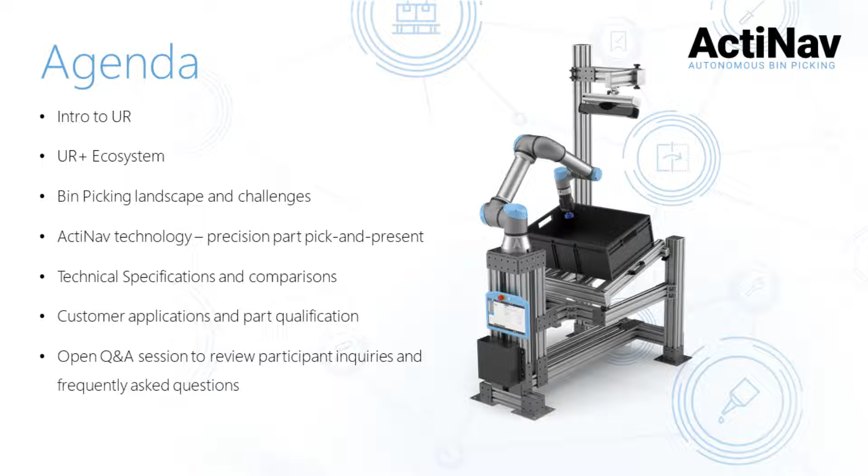A quick look at the agenda for today. I'm going to provide a very quick introduction to Universal Robots and our history in the collaborative robot space. We'll take a brief overview of our UR+ ecosystem and how ActiNav fits into it. I'll review the bin picking landscape of today and the associated historical challenges. I'll show you how ActiNav provides a precision part pick and present for a variety of applications with a primary focus on machine tending. Then we'll look at the technical specifications of ActiNav and compare it to some other bin picking technologies on the market. Then I'll look at application fit and some use cases, along with customer successes we've had. And finally, we'll have an open Q&A session to address some of your questions.

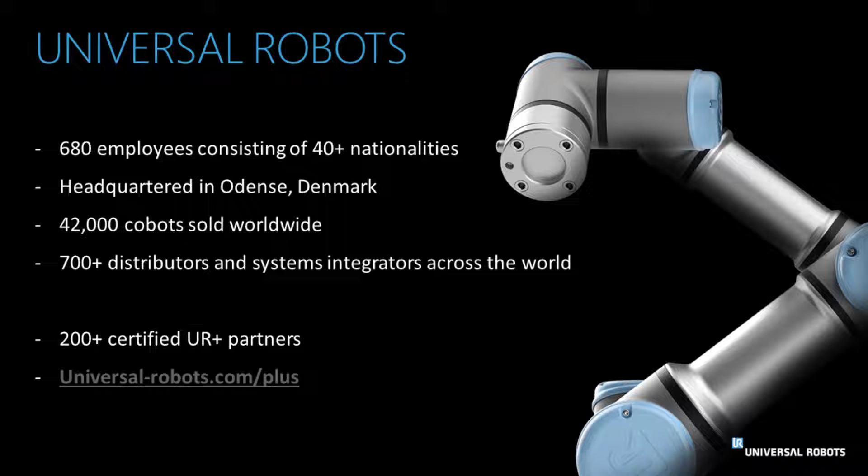So a brief introduction to Universal Robots. Universal Robots is a company of around 680 employees, of over 40 different nationalities. UR is headquartered in Odense, Denmark, where all of our robots are manufactured. We've deployed over 42,000 cobots worldwide and hold approximately 50% of the market share for collaborative robots. Our partner network is over 700 strong, including both distributors and systems integrators. Our UR+ store offers over 200 certified UR+ partners, UR+ being our peripheral ecosystem that I'll describe further on today.

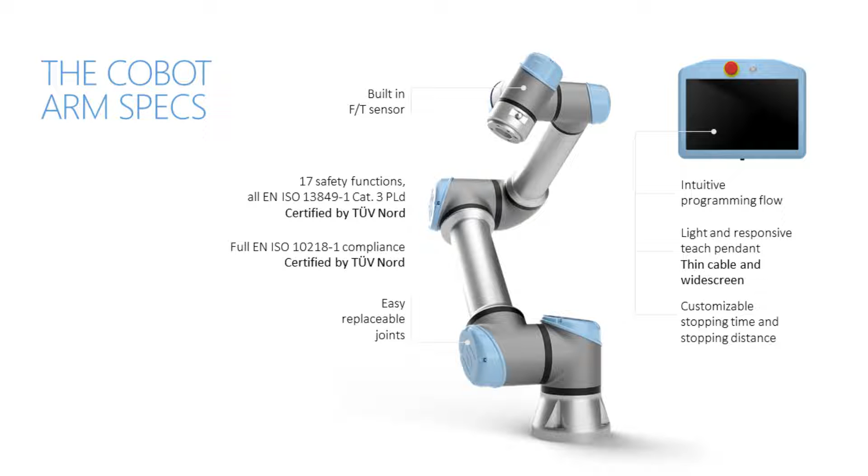The actual arm specifications themselves: all of our E-Series robots deploy with a built-in force torque sensor. We have 17 layers of safety functionality certified by TUV. We offer easily replaceable joints and a touchscreen pendant where all of your programming is done, including the ActiNav bin picking solution.

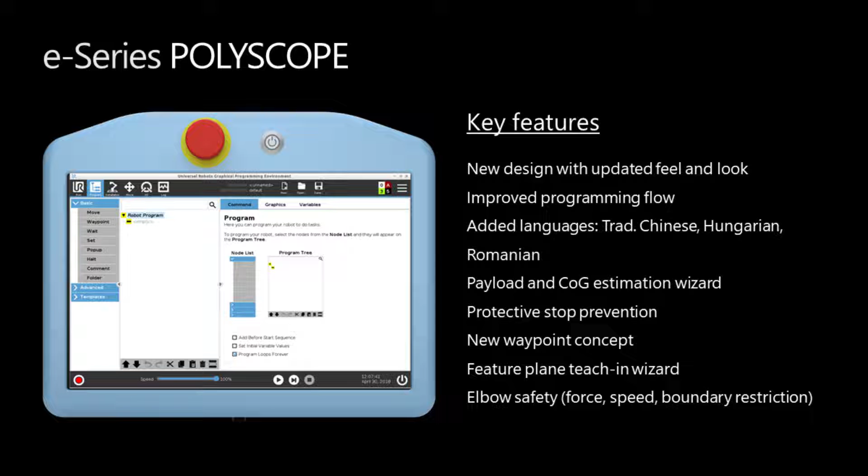The E-Series, again, our latest generation of cobot, has a number of improvements, including an improved programming flow, which we'll dive into a little bit further in the presentation, along with some wizards for payload estimation, center of gravity, and palletizing routines. There are also a number of safety features built into the new E-Series, including protective stop prevention and force, speed, boundary restrictions in the elbow.

A cobot can be thought of as a tool similar to a wrench, hammer, or a screwdriver. Using collaborative robots is significantly easier than the typical deployment of most types of traditional automation. Collaborative robots can quickly and easily be deployed to automate all or just a very small part of a process. This unique functionality allows for human workers to work with the cobot side by side and add value to each other's strengths.

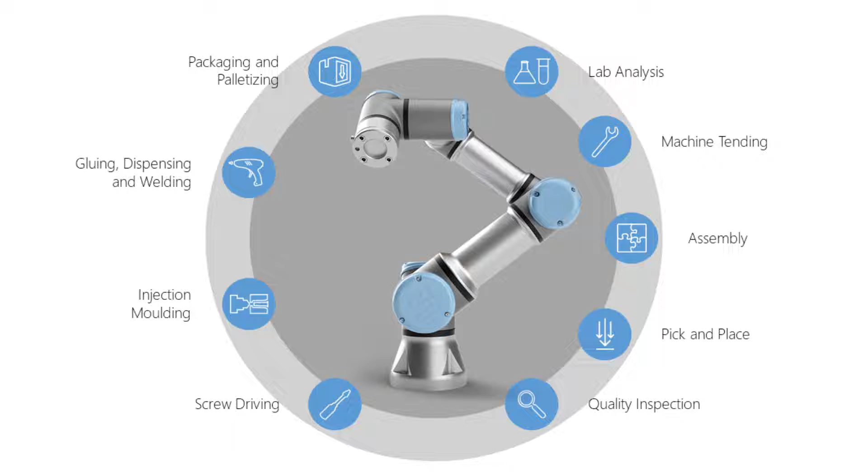Typical applications that cobots excel at are your standard pick and place, packaging and palletizing, machine tending, assembly and screw driving, quality inspection, but also path-dependent operations such as gluing and dispensing. However, we're not limited to just these types of applications. Sometimes apps can be very specific, such as cleaning parts with CO2, for example. These are applications that we see automated every day with tremendous success. They're common across all types of manufacturing and are proven to be great fits for cobots.

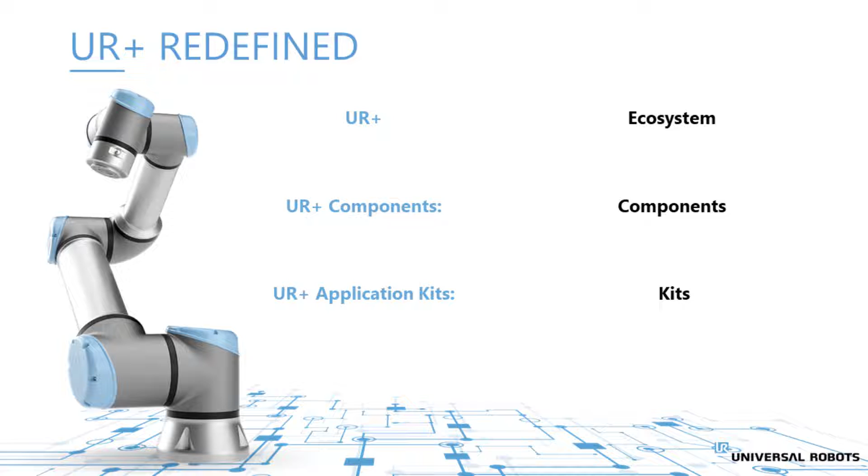All right, moving along to our UR+ ecosystem and how this links in with ActiNav. This is how UR+ is broken down. UR+ is our overall ecosystem. UR+ components are just that. They're going to be your peripherals that work seamlessly with our software and our robot. And then UR+ application kits. These are kits that combine those UR+ components with software targeted at solving a very specific application. ActiNav falls into the UR+ application kit.

So just to clarify the UR+ piece here, the components are certified by UR and are those individual components such as cameras, end effectors, and other accessories. They're general purpose and can be integrated by end users, distributors, integrators, or machine builders. The UR+ application kits, again, take those components with a layer of very custom software that makes solving a specific application easy. These are going to be focused on categories such as sanding, welding, palletizing, and of course, bin picking.

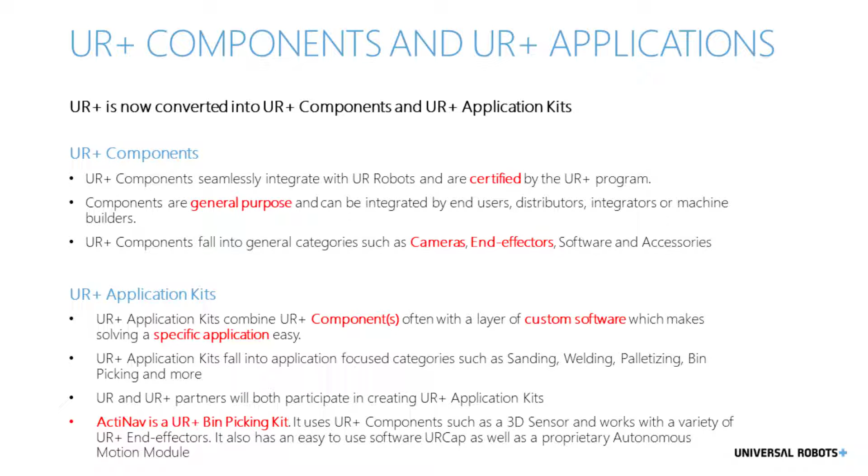So ActiNav is a UR+ bin picking kit. It takes a 3D sensor from Photoneo with a variety of available UR+ end effectors, and it has really easy to use software through our URCap.

So this leads us to the landscape associated with bin picking and machine tending. Bin picking has been around for decades at this point, and I certainly don't want to pigeonhole ActiNav into just machine tending. However, it's an area where we found it to be a really great fit and easy to justify. So just to clarify and keep minds open, ActiNav is suited for anywhere that you need a part placed in a very repeatable and accurate manner.

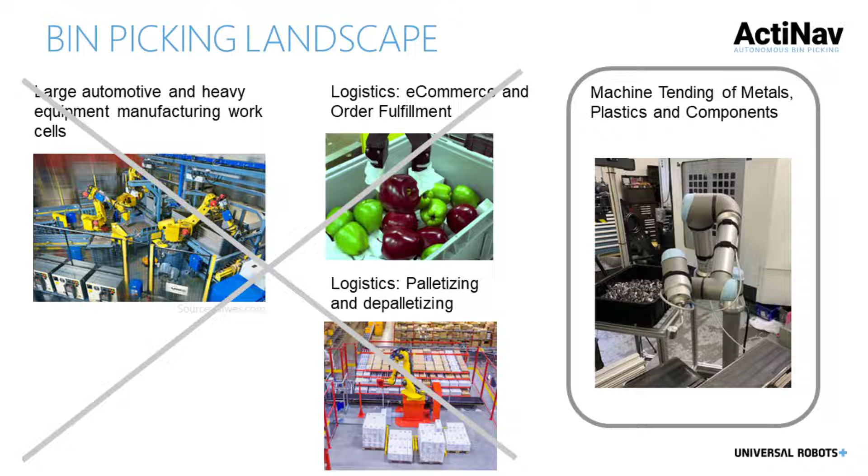So there are a great variety of bin picking applications out there, but we are largely targeting machine tending of metals, plastics, and components, and I'll explain momentarily. But here you see we've got some large automotive and heavy equipment work cells, some e-commerce, and that's simply not a good fit for us, and we are, again, targeting the machine tending.

When looking at these heavy equipment work cells that you most often see in automotive, they're typically very fast with very high throughput, and they require safety features including guarding and scanners. They also require weeks of programming time and certainly a tremendous amount of resources and specialists. Entry into these systems are often into the multiple hundreds of thousands to millions of dollars.

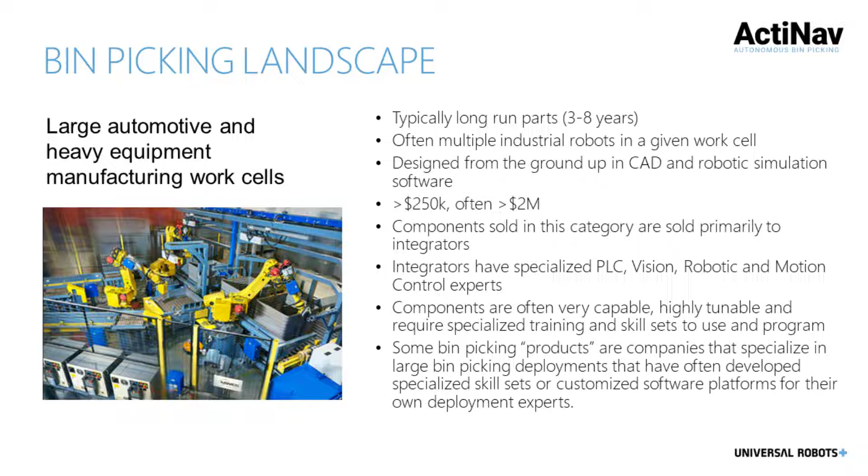And to be able to justify that cost, the parts are going to be very long run in that 3 to 8 year range. And systems like this are going to be a bigger challenge to redeploy should the project change.

Contrasting that, logistics such as your e-commerce and order fulfillment oftentimes involve integrating with ERP systems, calling databases, and they're going to be a really large IT project. These are more commonly pick and drop applications, or stab and grab, if you will, placing parts into boxes or other totes. In many situations, the product is going to be in a flexible packaging, which requires flexible grippers or long and cumbersome end effectors.

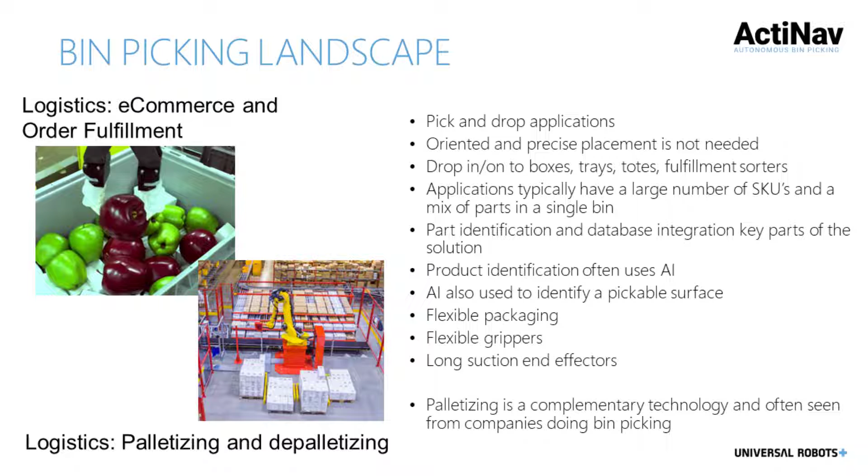Certainly has a place where appropriate, but not a good fit for ActiNav. And these e-commerce based are going to be more surface identification with vision rather than a CAD matching of the part.

We've determined that ActiNav is suitable for machine tending of the metals, plastics, and the components. In a lot of circumstances, it's a single part going from a bin into a machine, which fits really well with ActiNav. Most machine tending applications require a very precise pick and placement of the part as well. The simple teaching method of ActiNav allows for really smooth retrofits into existing stations that are already in production, and it's fully collaborative.

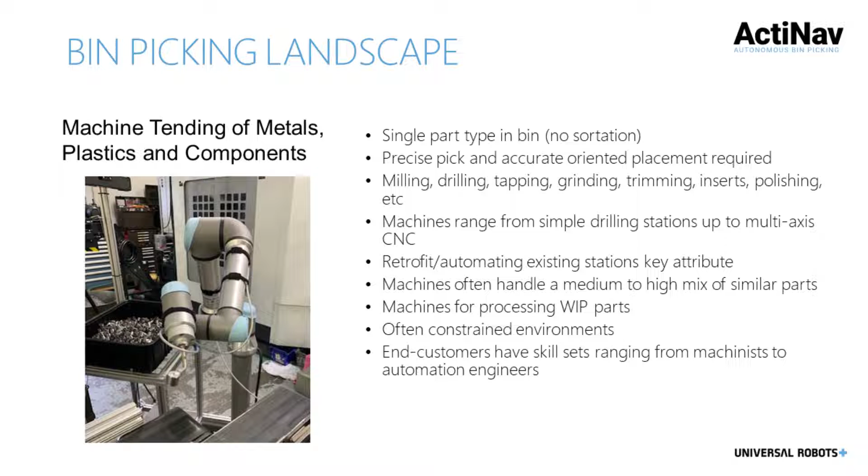I'm going to very quickly address the 3 Ds that are associated with machine tending. It's dirty, dangerous, and dull. As many of you know, machine tending is a repetitive job, and it can oftentimes be dangerous. The ActiNav system is designed to offset these challenges as well as address a variety of labor issues, including absenteeism, high turnover, high labor shortages, just labor issues in general.

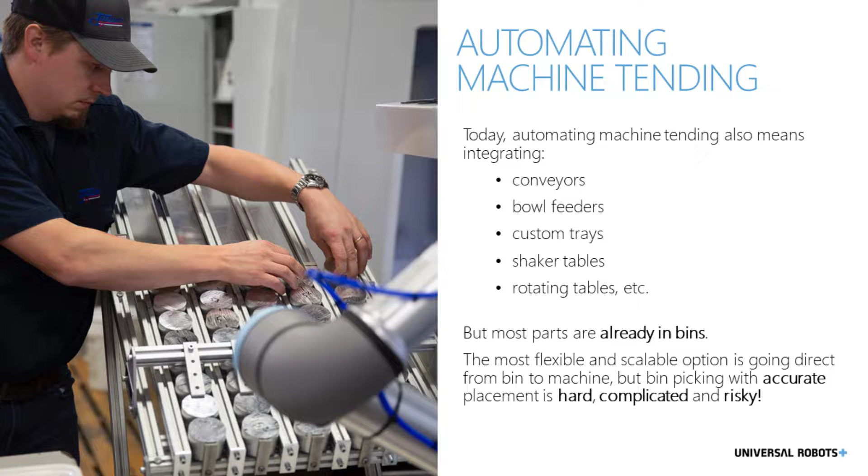Automating the process of machine tending, however, is a lot more than just programming a robot. It means integrating conveyor systems, bowl feeders, custom tooling and fixturing. In a lot of circumstances, parts are already in the bin, which makes going direct from a bin into a machine a flexible and scalable option. But of course, bin picking can still be a challenge. So we are introducing ActiNav, a bin picking system that's simple and reliable.

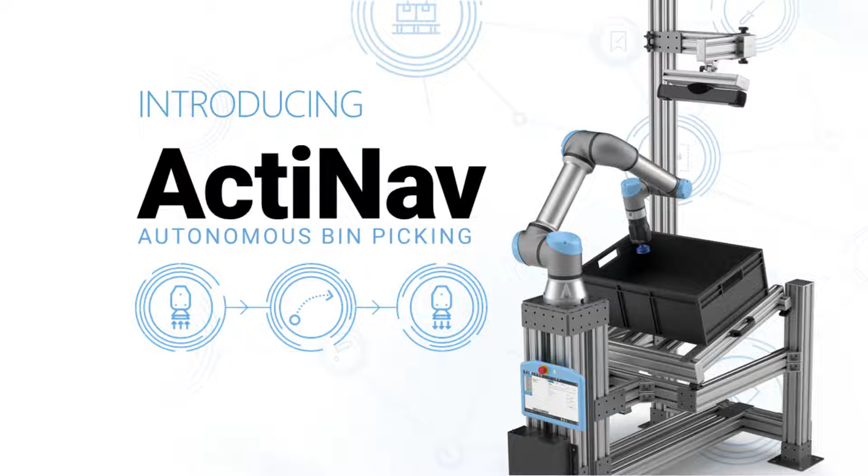The ActiNav autonomous bin picking takes a market-leading collaborative robot with Universal Robots, a PhotoNeo 3D sensor, and autonomous robot motion control to solve unstructured bin picking and accurate placement for machine tending. So the big takeaway here is unstructured bin picking to a very accurate placement of the part. So next, I'd like to play a couple of quick videos for you just to let you see this in action.

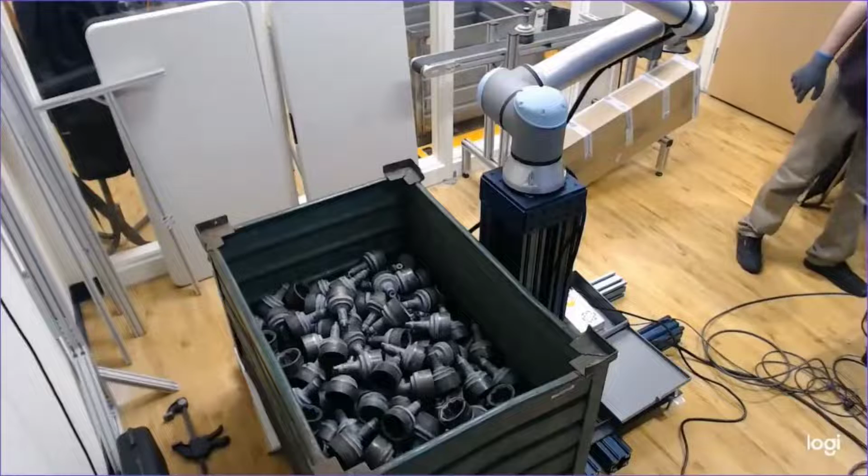Next, we'll take a look at the autonomous motion module and look at a couple of videos. ActiNav actively navigates the robot autonomously into the bin, picks a part, and then moves through the environment collision-free, then placing the part accurately into the machine. You'll notice as these videos continue that no two paths are the same. The AMM takes into consideration the trained environment that we've given it, as well as the bin and other criteria, and then also works to make sure it avoids any type of singularities and other obstacles.

In this particular video, it's picking heavy cast parts from the drive shaft family, as you can see. The robot moves to the home position here, out of the sensor view for image acquisition. And keep in mind, it's always planning multiple paths ahead. So it picks a part and moves it to a conveyor belt in the top of the video.

This particular video represents a customer application where they had an hourly operator standing by an angled bin, picking parts, and then feeding them to a conveyor system, which then took the parts further downstream for continued processing. So here it's placed the part on the conveyor belt. We'll pick a part and you'll see it's a completely different path this particular time.

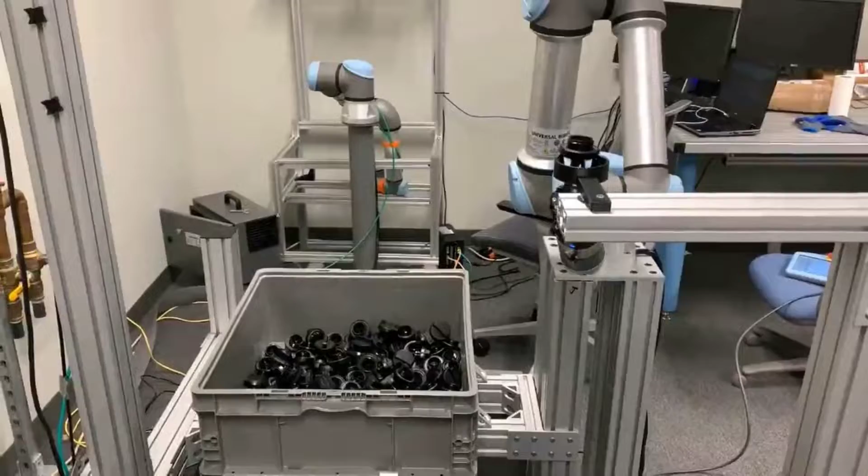In this second video, the robot is moving through space in a collision-free way. The product that it is picking out of the bin are plastic, either gas or oil caps, using an internal gripper. It places the part in the fixture where an operator can move it towards the next process, in this case being an O-ring inspection. But the robot could also be taking these parts and placing them into a regrip station for repeatable placement into a machine, depending on how the part was picked.

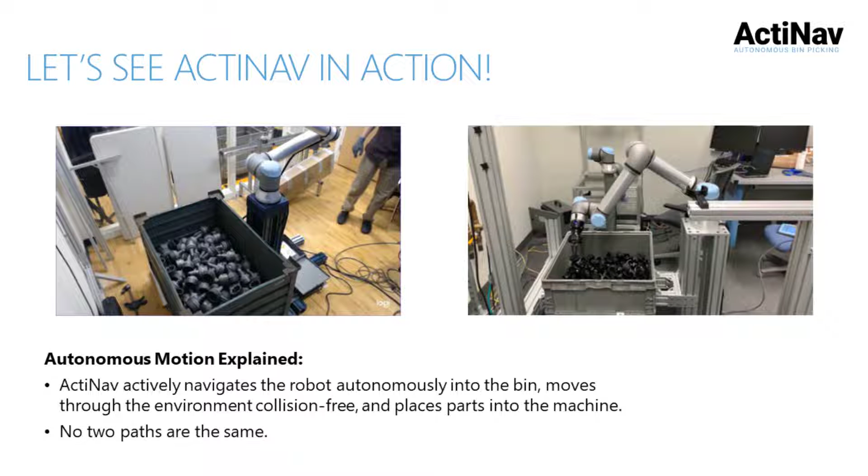All right, so speaking to the autonomous operation of ActiNav, the system is designed for both tended and autonomous machine tending. From a justification standpoint, ActiNav addresses a number of key needs, most oftentimes associated with machine tending. The Autonomous Motion Module, or AMM, plans the path collision-free. So no more workstation repairs, and it's fully collaborative.

The ability to scan deeper bins allows for less refilling and more parts per bin, leaving you with less human labor requirements for the bins themselves. And accurate placement of the parts has always been a big challenge. We'll discuss some of the repeatability a little bit more in depth further down the presentation.

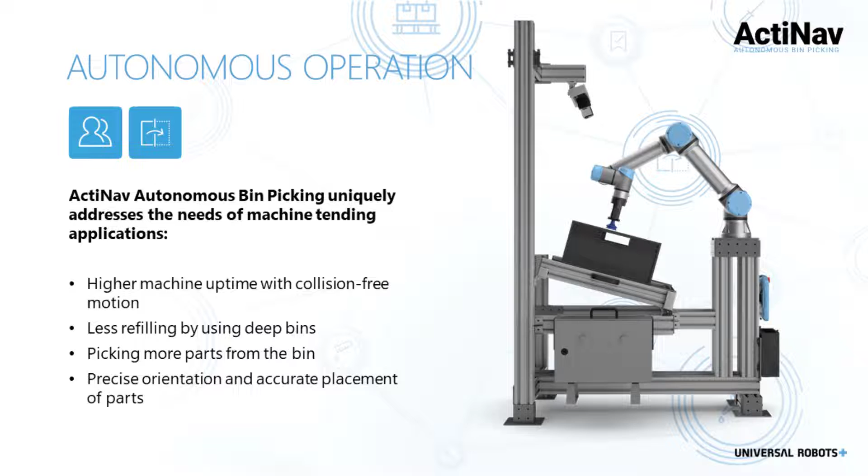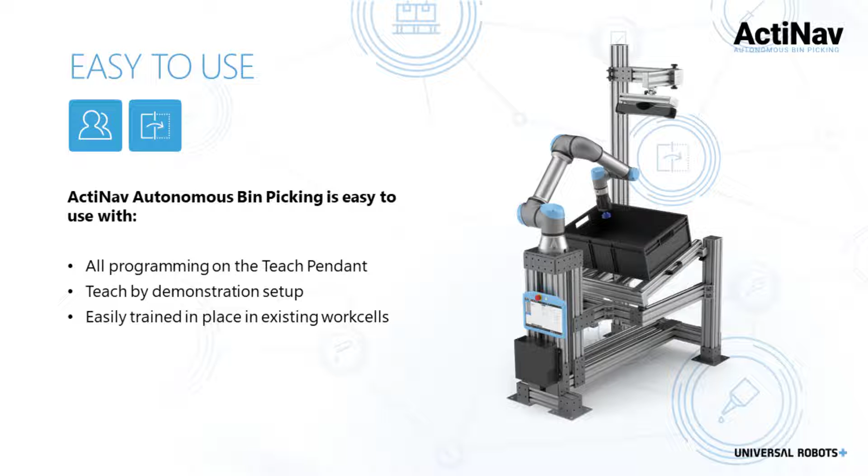Speaking to the ease of use with ActiNav, Universal Robots are known for ease of use. Here at UR, we use the verbiage teaching our robot rather than programming. All of the code found in traditional robots is completed in our UI using basic commands like move and waypoint. The same ease of use applies with ActiNav. All of the programming for your bin picking project is done on the UR Teach pendant, and we utilize the same teach by demonstration for setup that we do with your typical standalone collaborative robot application.

Another advantage with ActiNav is that it's going to be quick to deploy into your factory. There are 6 simple predefined tasks in the URCap on the Teach pendant, which walk you through the entire setup process. You can expect between 6 and 12 lines of programming for a bin picking application versus hundreds without the Autonomous Motion Module.

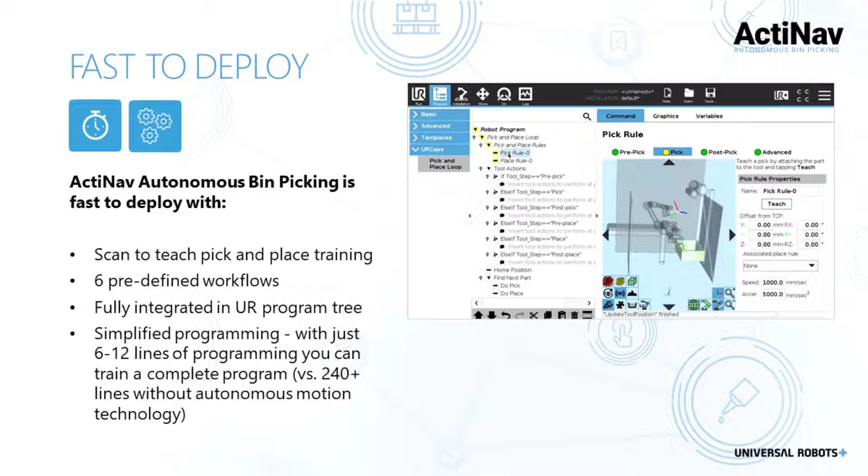I mentioned earlier that all the setup was done on the Teach pendant. This is a snapshot of what the URCap ActiNav user interface looks like on the UR Teach pendant screen. The bin and the surrounding environment are taught by demonstration, touching the actual objects and adding them to the virtual environment. So to do so, we first ensure that the system is ready. Secondly, we'll configure the 3D sensor and align it. The system deploys with an alignment marker, which we show to the sensor in a series of various poses.

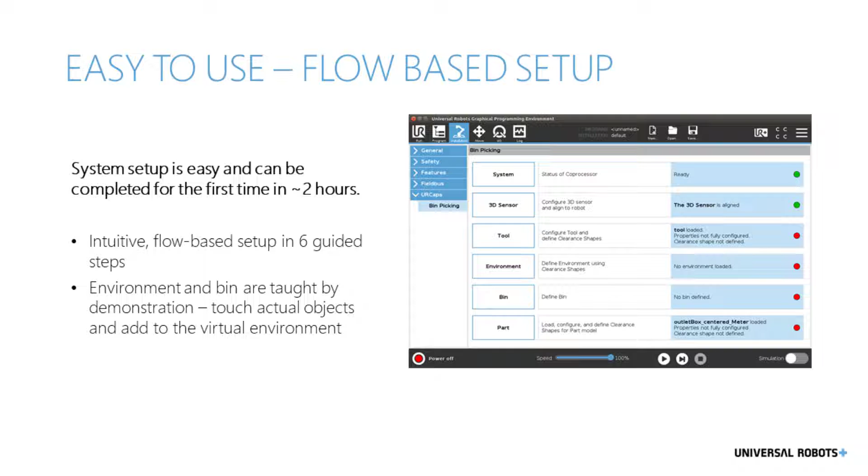Third step would be to configure your tool and define any clearance shapes. Then we'll define the environment surrounding the system. So any obstacles that could be in the path, a pedestal, a pillar, perhaps the fixture that this ActiNav system is sitting on, we would want to program. And then we'll define the bin. So bins have always been a big challenge for robot entry and exit. We'll show the sides, the tops, and the bottom to actually train and define that bin. Finally, we'll load a 3D CAD model of the part and scan to teach.

It's important to train the environment, of course, so that we can avoid collisions. Since no two paths are the same with ActiNav, we need to add clearance shapes. In this particular example here, we are training a capsule shape, which represents the 3D sensor in the environment. For the environment training, we can use spheres, capsules, or lozenge shapes. So first, we will train the points for each end, shown here, point 1 and point 2.

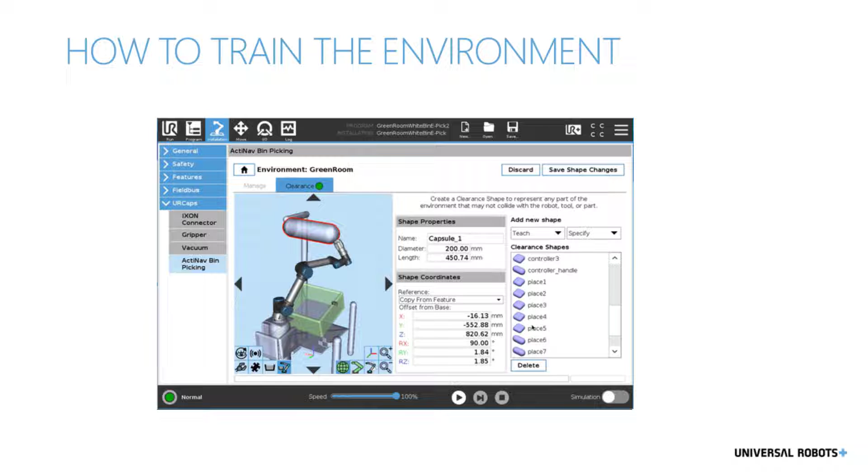Then we could change the name of the actual shape to its appropriate name in the program, such as 3D sensor. Then we'll input the diameter here of the capsule shape representing the sensor. And then finally, we'll input the length of the sensor. And as you can see here, we've now trained that capsule shape, which represents the 3D sensor, so that we can avoid any type of collision.

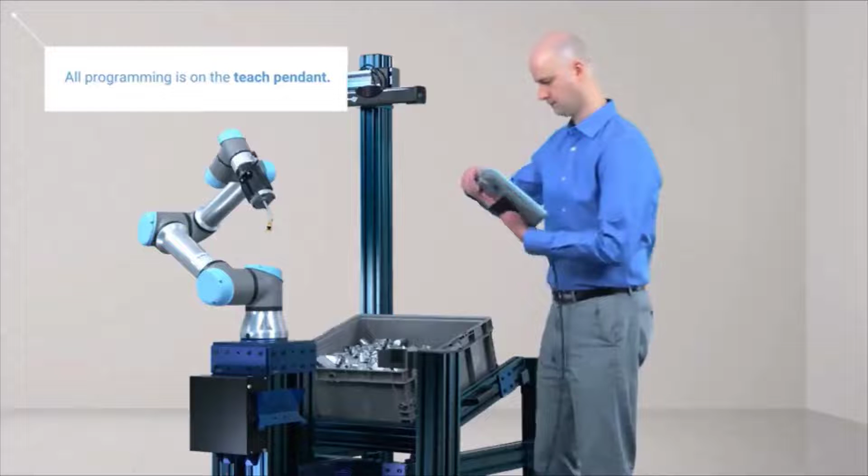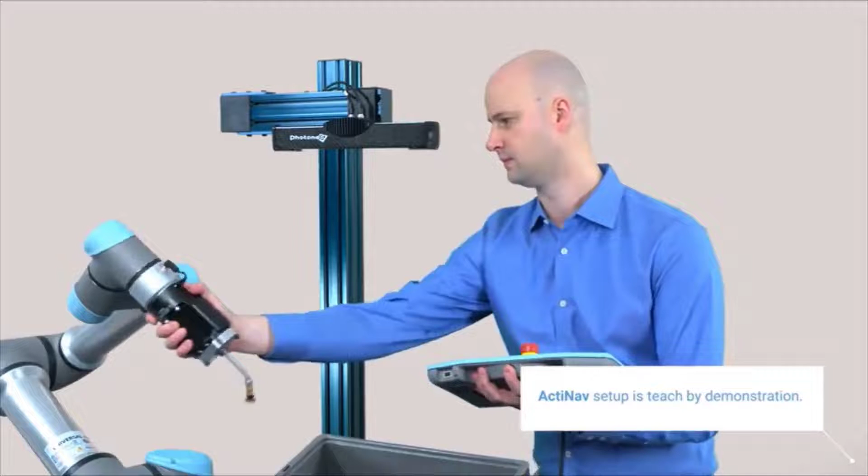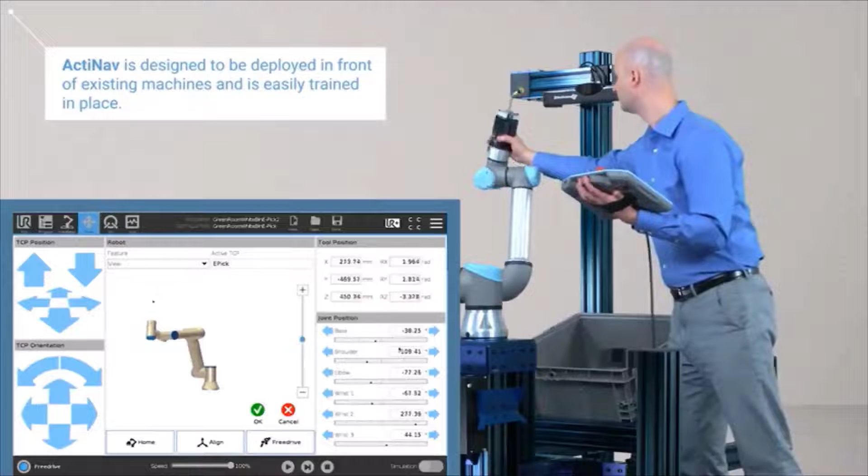That being said, I think a video will do better justice than I will, so I'm going to play a quick video here for training the environment for you. Here, the operator is going to train the environment, starting with the sensor. He'll do all of the training, teaching, on the Universal Robots touchscreen pendant. Now he'll use free drive to freely move the robot around through space. Free drive allows you to apply a force by hand in order to position the robot where you want it. Next, he'll show the system both sides of the sensor, as shown here, to avoid any types of collisions.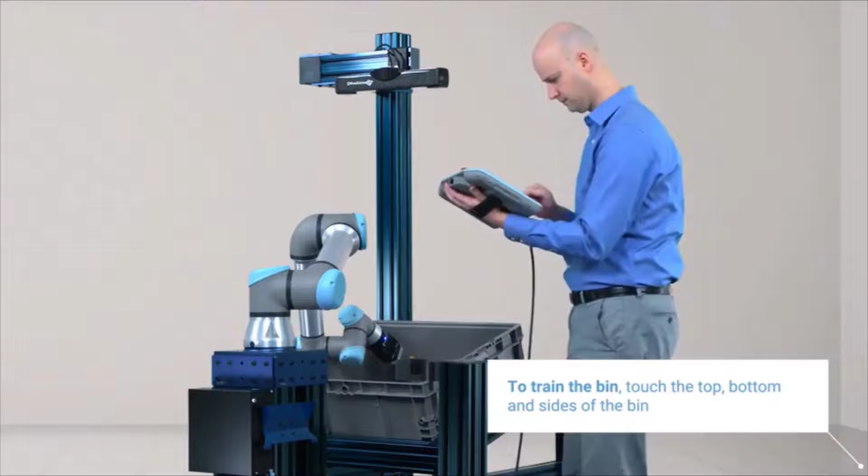Now the operator will move to train the bins, where he'll show the system the sides, the bottom, as well as the top of the bin. So here he's training multiple points on the sides of the bin. And we'll move to the top of the bin, and then continue on to program the bottoms of the bin.

When it comes to the teaching of the part, the ActiNav system uses a scan to teach. Step 1 is to import a CAD model of the part into the teach pendant using a USB.

We'll then attach the part to your end effector of choice. We'll position the part under the scanner in the field of view and press scan on the teach pendant.

From there, you just have to simply position the part at the locations for place, pre-place, and post-place using free drive. Keep in mind, this is not remembering a robot pose, but rather the position of the part in space. The robot joints are autonomous and are going to be in a unique combination each time.

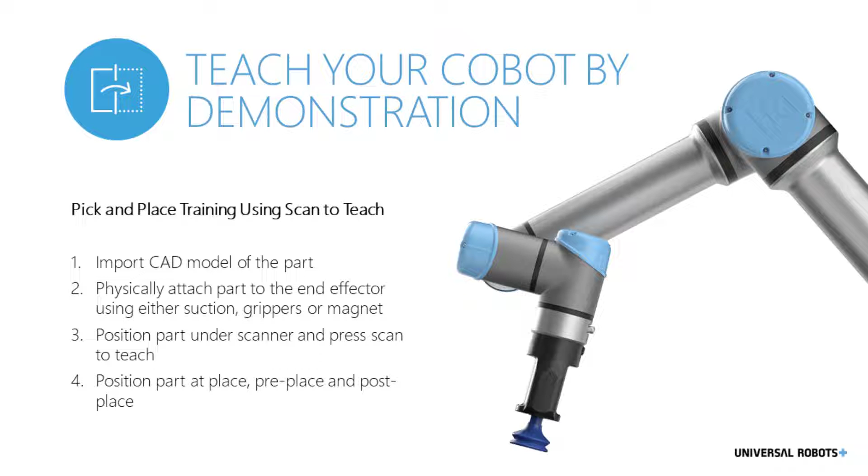So in terms of ease of use and the simple teach by demonstration, the ActiNav system is exactly that.

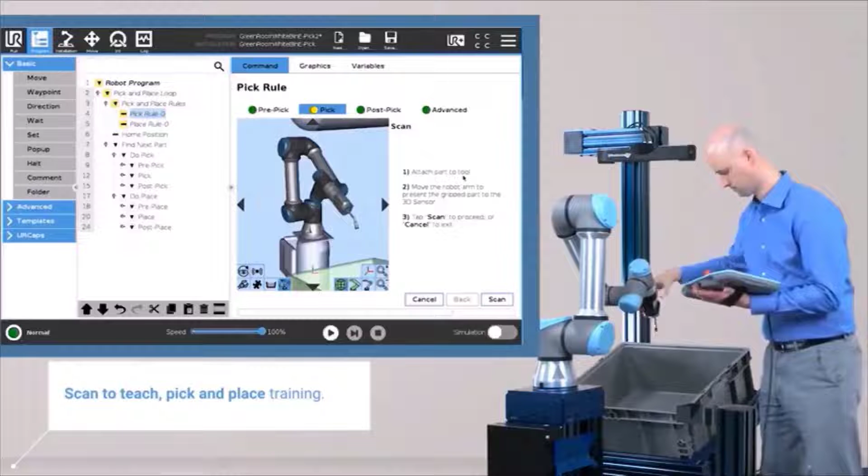Next I'll show you a quick video about how to train the pick and the place. In this next video, the operator is going to use the scan to teach functionality to show the robot both the pick and the place locations.

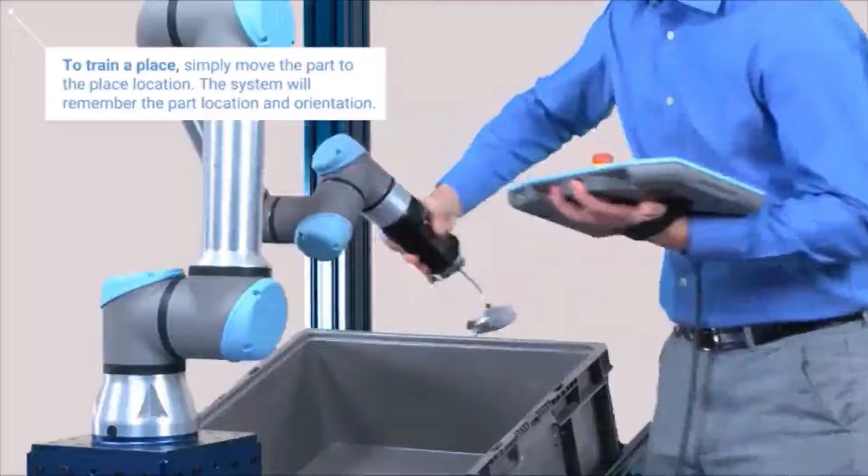To actually train the pick, the operator simply attaches the part to the end effector, hits scan, and acquires an image. The system will remember both the part location and the orientation.

Here, he uses free drive to move the robot and the part to the place location. Once both the pick and the place locations are trained, ActiNav can continue operation.

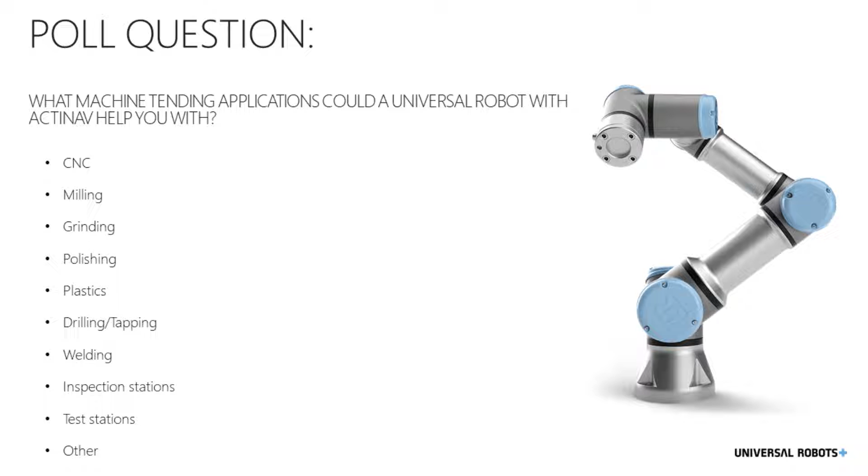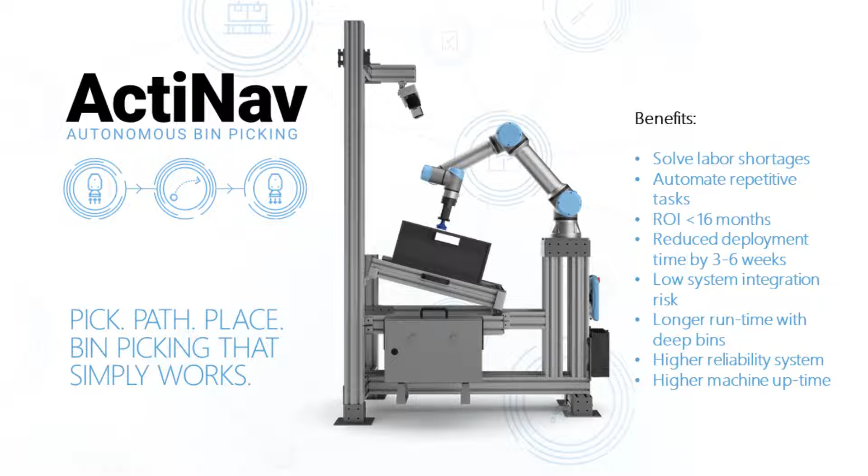Thank you, Mark. So on top of solving labor shortages, we found the return on investment to be under 16 months for this product based on a two-shift operation.

Here in New England, the average setup time from unboxing both the robot and the bin picking system to deployment is less than 2 days. That's a drastic reduction in deployment time compared to other bin picking technologies.

With the depth of the bins that we can support, you can expect a longer runtime between bin filling, and certainly a higher reliability on the system, as the two main components, the UR robot and the autonomous motion module, are made to work with one another.

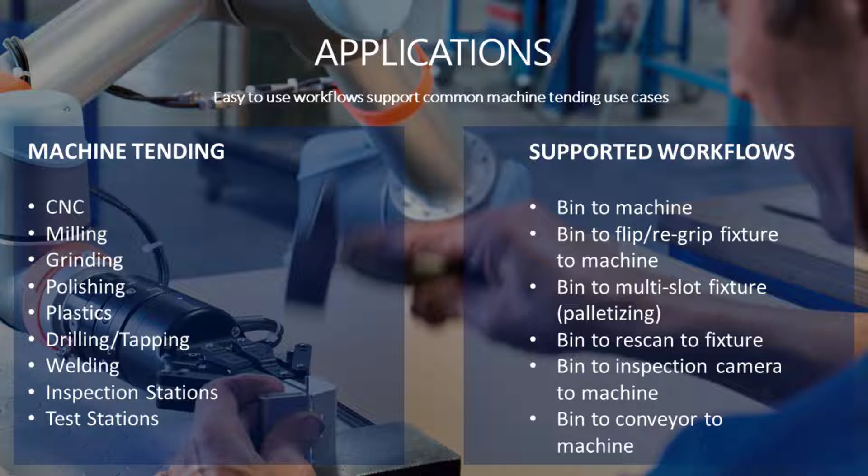So let's take a look at some of the most common machine tending applications, and this relates to the survey that we are taking now.

When looking at CNC, milling, grinding, polishing, the ActiNav system can support quite a number of different workflows. Your first being your typical picking from a bin and placing into a machine where orientation isn't as critical, or a bin to a regrip fixture where the robot will place the part in the fixture, release, and then pick the part back up again so it's in a repeatable position prior to placing in a machine.

A bin to a multi-slot fixture, perhaps waiting for the next process, and this is where the value of UR palletizing wizard certainly matches up with ActiNav. A bin to a rescan to a fixture, or to maybe an inspection camera prior to placement in the machine, and of course a bin to a conveyor, which then continues the part further along the process.

Next, we'll take a look at how ActiNav actually works and some of the key functionality behind it.

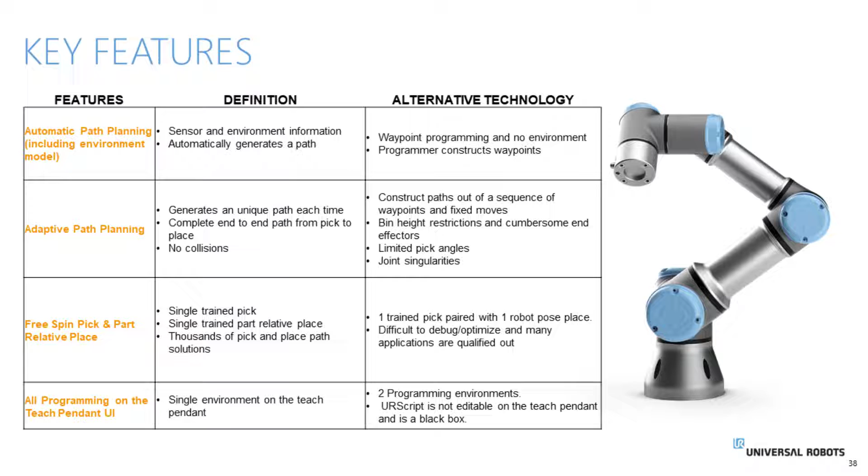Some of the key features here, the first being the automatic path planning piece. This utilizes the 3D sensor and the environment information that we provided and trained, to automatically generate a path at runtime. Traditionally, this would require waypoint programming with no environment information to help avoid collisions.

Whoever was programming constructed individual waypoints to cut the problem up into smaller sections. Trying to take into consideration the environment has always been an obstacle. With the adaptive path planning piece, ActiNav generates an optimized path every time. There are no programs, waypoints, or poses.

It's a complete end-to-end path from the pick all the way to the place. Alternate technology requires construction of the path using a sequence of waypoints and fixed moves, which isn't always practical. The programmer also has to use an end effector that's equal in height to the bin depth in order to avoid collisions and keep that robot above the bin.

With the free spin pick and the part relative place, I'll show you an example on the next slide, but we use a single trained pick, which automatically generates hundreds of possible picks. The single trained part relative place results in thousands of possibilities for robot poses to achieve the place. Combine that free spin pick and the part relative place, and we enable thousands of pick and place path options that give us a really high pick success.

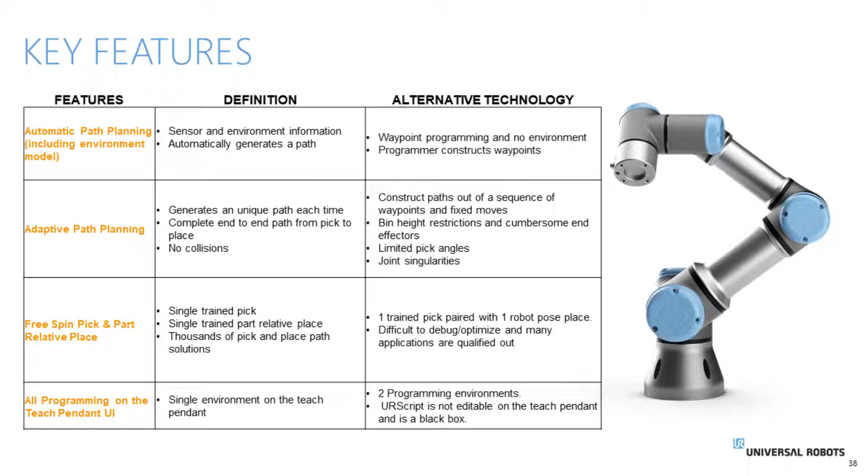The UR script that's being created by ActiNav is completely locked down. You can, however, continue programming prior to and after that path planning. So for those of you familiar with UR, you can program in the UR world, enter ActiNav, and then re-enter the UR world, as long as you're in the same pose as you were when you left ActiNav.

So free spin pick is a function of the proprietary nature of this system, and it allows the tool to spin a full 360 degrees for the approach and the exit without collision. So here it's going to allow tool rotation around its Z-axis at a given pick point.

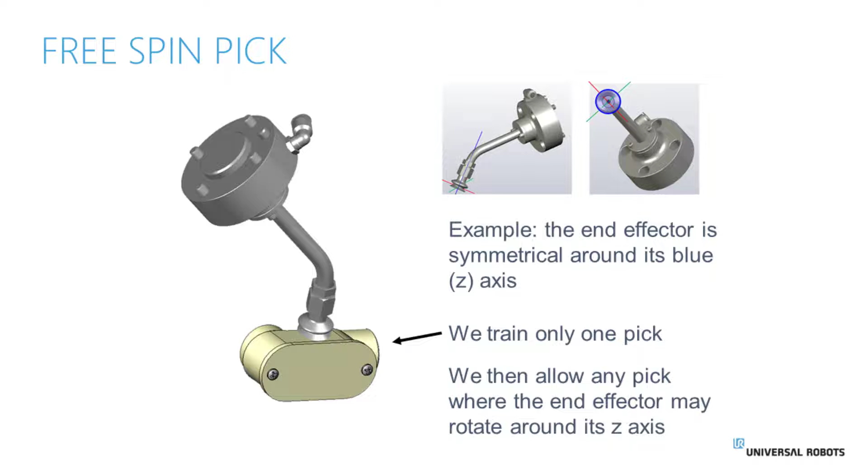This slide does a really good job of highlighting why ActiNav. It's a breakdown of how simple the programming really is. Free spin pick combined with the autonomous path planning and the part relative place allow just one pick per side, so 2 lines of programming. A 6-sided part ordinarily has 3 pickable points and thus 6 lines of code with our system. More traditional bin picking requires 8 to 12 picks per side at 10 lines per pick, leaves you with over 240 lines of code.

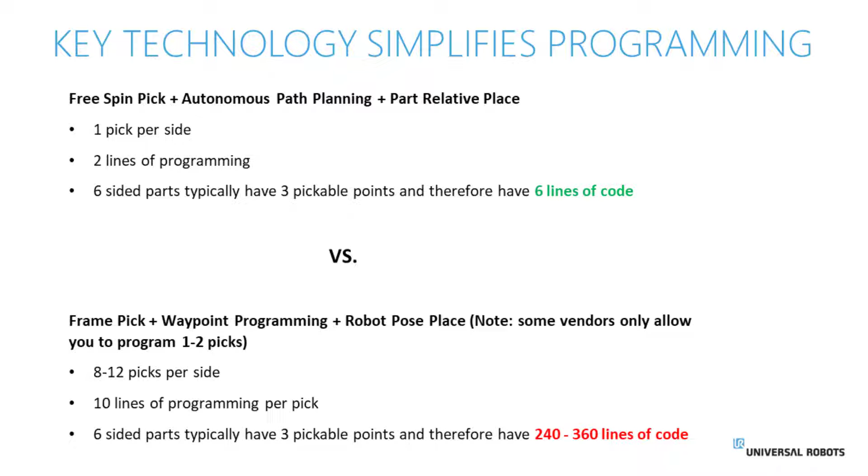Next, I'm going to play a short video for you here that gives you a good breakdown of the adaptive path planning. This next short video clip illustrates the adaptive path planning of ActiNav.

The part shown here has 3 different sides that it can be picked from. Each path is unique based on the pick location on the part. So in this next pick and place with the blue color, you'll notice it's a completely different path, but it's also placing on the other side of the fixture. So it's doing the pick and place collision free, but it's also avoiding any type of joint singularities.

Some bin picking, the more vision-based bin picking, you don't have that visibility to the joint limitations. But again, here, no path is going to be alike. And this final illustration with the comparison of the colors does a really good job of illustrating that.

All right, next we'll dive into some of the features and benefits of ActiNav. The automatic path planning drastically reduces the programming time and the skill set requirements of the programmer, as well as the overall project complexity. This reduces deployment time by weeks.

If your environment changes, we simply model the change and the rest of the program adjusts. This leads to a drastic reduction in overall project risk. With the adaptive path planning, it gives you an overall reduction in the integration complexity and no manual determination of paths. Stoppages that are due to collisions are eliminated, and it provides you with simply a more reliable system.

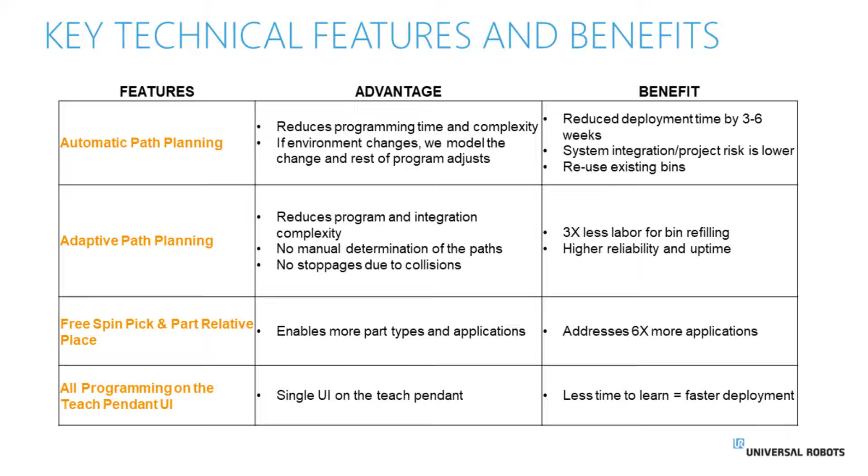With the free spin pick, this enables more part types and applications which typically require precise and accurate orientation placement. This allows you to address multiple times more the number of applications with ActiNav. And again, all programming on the universal robots teach pendant. It's all integrated into the program tree. This means for you less learning requirements and less training for a successful deployment.

When considering ActiNav as a bin picking solution, there are a few key attributes to take into consideration. First being a single type of part in a bin, and this is most critical, so it does not support mixed parts in a bin. We do support a variety of different end effectors, whether it's suction, magnetic, or internal grippers. The sensor does need to be fixtured directly above the bin.

It will support different angles of bins with some small and obvious limitations based on an angled bin. A rescan or a regrip will certainly increase the accuracy of the part placement if your cycle time allows for it, but the direct bin to place accuracy is in the range of plus or minus 3 to 8 millimeters, depending on the resolution of sensor that we use.

Our ideal application has a cycle time really in the 10 to 90 second range. We found it difficult to justify anything above a 90-second cycle time. In terms of part shape, symmetric, axisymmetrical, or non-symmetrical, there's just a minimum thickness requirement of either 2 millimeters or 5 millimeters, and that's simply for the contrast needed for the 3D rendering.

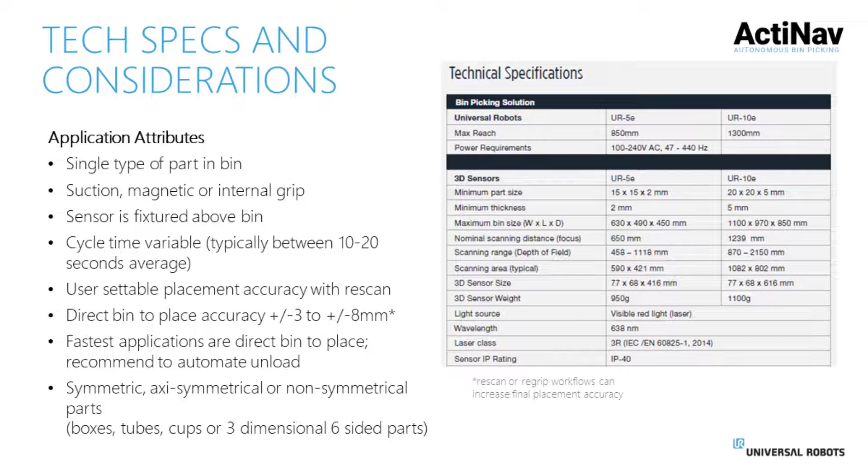So a quick look at some other technologies and how it compares to ActiNav. ActiNav utilizes a single sensor, which relies on CAD-based matching algorithms. Thinking back to some old bin picking systems I've seen in the past with 4 cameras, the calibration is a nightmare if an operator knocks into just one of the sensors.

Other bin picking technologies often rely on lower resolution 3D sensors that use AI or training of a pickable surface. While this can sometimes be faster to set up, it's going to be a far less precise means of doing it. ActiNav is designed for a single part type in the bin.

Other bin picking products do sortation and part identification with a large variety of parts in a bin. We found that with machine tending, this doesn't apply—that's more focused on the e-commerce sector.

High accuracy placement into chucks and fixtures is possible without the need for a regrip, using adaptive path planning and part relative place. A majority of other bin picking products focus on pick and drop applications which don't require a part to be oriented at the place. These are basic pick and place applications only, and they rely very heavily on secondary fixtures.

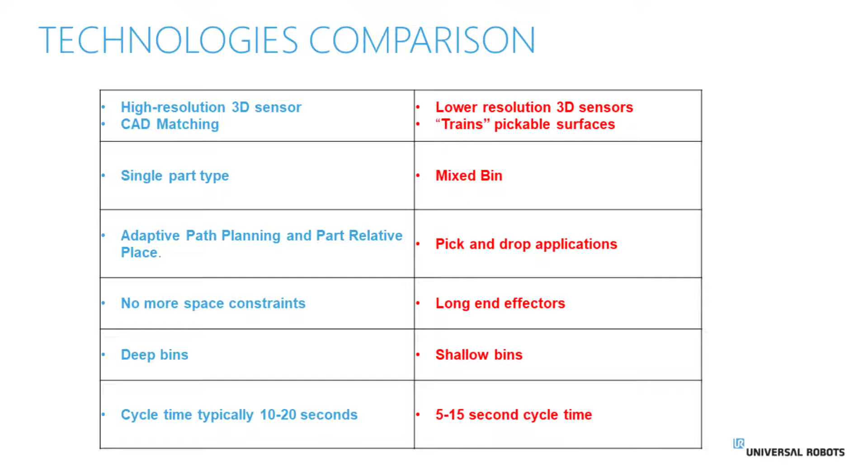Furthermore, path planning means the system can work in deeper bins, which means less bin tending and longer runtime between bin refills. Others require shallower bins, which simply require more tending. And finally, the cycle time we're really targeting is the 10 to 20 second range. Industrial and those high-speed applications in the sub 10 second range are just really not a good fit for this system.

So next, I'd like to take a look at some of the part qualification and some applications where ActiNav has been a good fit.

So here we have some examples of typical parts best suited for bin picking and most often seen, whether it's metal, plastic, fiberglass, cast parts, or stamped parts. The general rule of thumb for ActiNav and part selection is 2 fists or less. Parts larger than that will fill the bin with too few parts, which makes it a lot more challenging to justify, and it could also lead to payload limitations with really heavy cast parts.

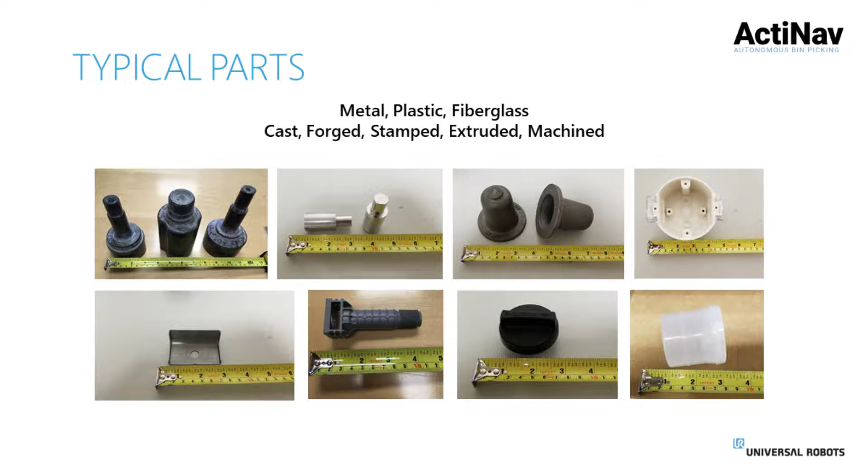Continuing on, cast or machined parts that have multiple picking surfaces—anything cylindrical has some good options when it comes to picking. Gears and rings with an internal grip end effector have done really well, especially here in New England. And then flat parts, again as long as they have that minimum thickness of 2 millimeters to accommodate the sensor.

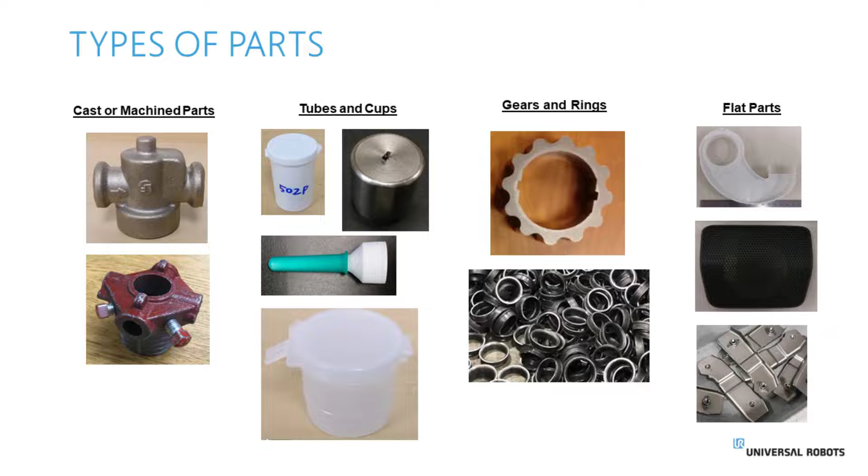So I'd like to show you a quick video here of an application that we tested in our lab, just to show you some of the different projects that we can solve.

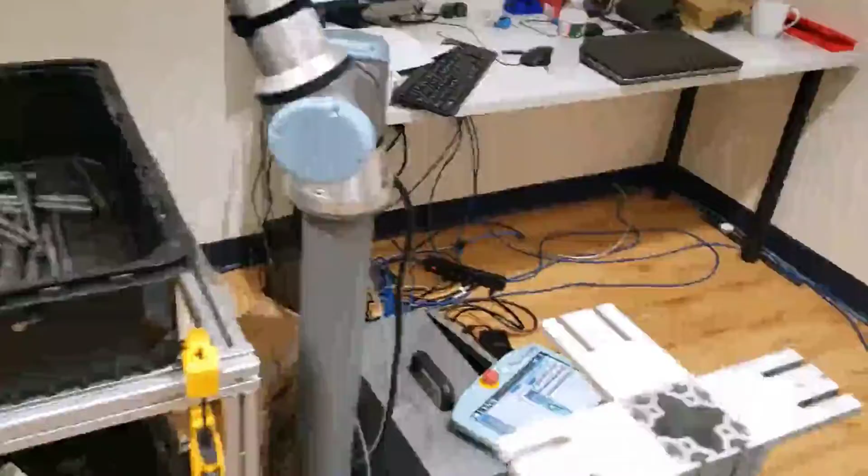This next video example shows an application that we tested for a customer in our lab. You can see here we're using a magnetic end effector for this project. Where applicable, we can certainly recommend end effectors that will demagnetize the parts so you don't have any residual magnetism. This shows the robot in the home position when the image is being acquired, taking a new path every time for accurate placement into the fixture.

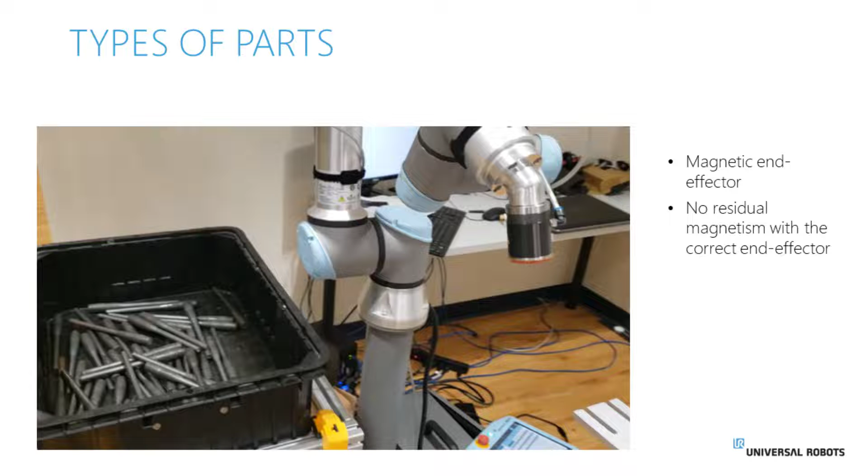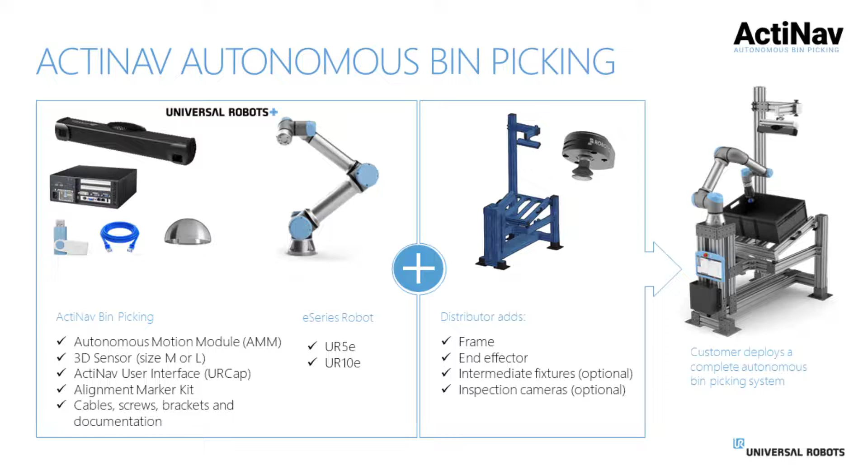So commercially speaking, many of you are likely wondering what's in the box. The ActiNav system is made up of an autonomous motion module, which is that little black box you see below the teach pendant on the right image.

A 3D sensor, which is from PhotoNeo, is available in 2 different sizes. The general rule of thumb for bin sizes is either 0.5 meter cubed or 1 meter cubed, and I will send out this presentation at the end for anybody looking for those true tech specs. It comes with a URCap, an alignment marker for the 3D sensor, cables, screws, brackets for mounting, and all of the appropriate manuals. The kit also includes either a UR5E or a UR10E currently.

From there, the distributor would add a frame, an end effector that matches the application, any intermediate fixtures or inspection cameras, and any of those peripherals.

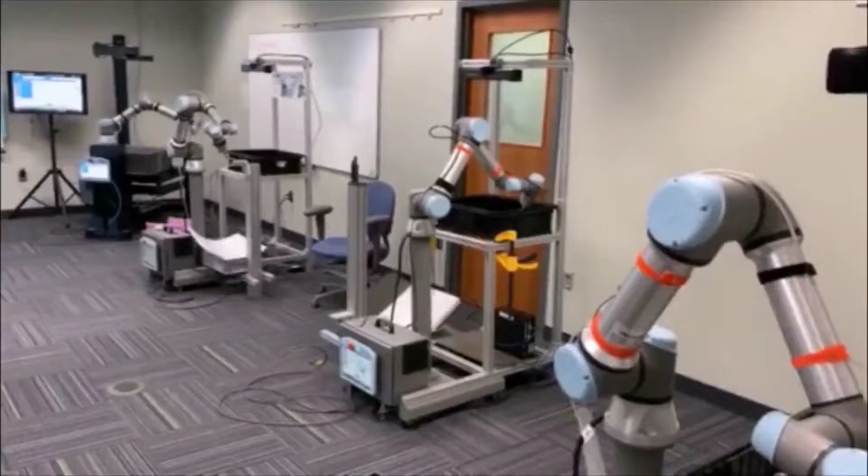Next, I'd like to show you a very quick video of our training facility to show you what the training looks like for ActiNav. This is our training facility located in North Reading, Mass, where trainees can get hands-on with the ActiNav system. All of our North American UR offices are equipped with ActiNav demo units, and we are offering virtual product demonstrations through both our partners as well as our UR offices.

Great, so now we're going to take a look at the poll results. Everybody participated, I hope, and we're going to go ahead and take a look at those results and push them out to the audience.

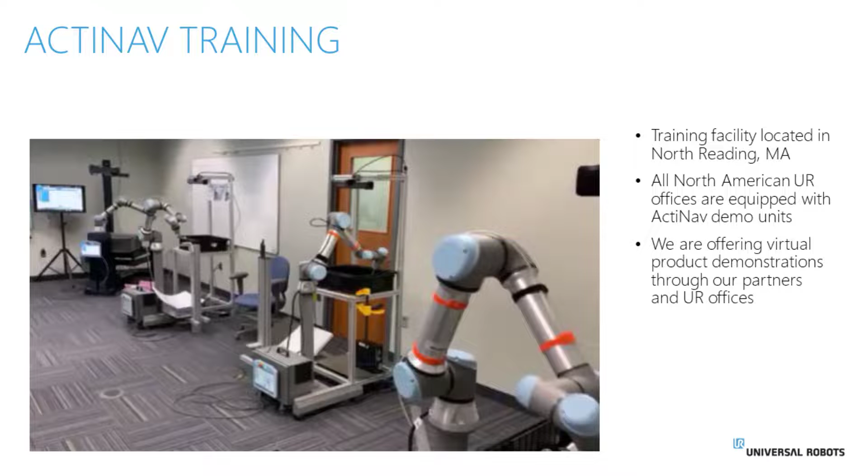So to summarize, ActiNav is an autonomous bin picking system that accounts for the vision aspect of bin picking, which is finding and locating the orientation of the parts. But not only that, it also accounts for the full end-to-end motion, which includes part relative placement. So it's a complete end-to-end path from the pick to the place. Looking here, whether that's grinding, plastics, or inspection stations, there's quite a wide array of answers. It looks like it could be a great fit for all of those. It has that same ease of use that comes standard with our standalone collaborative robots and a quick deployment.